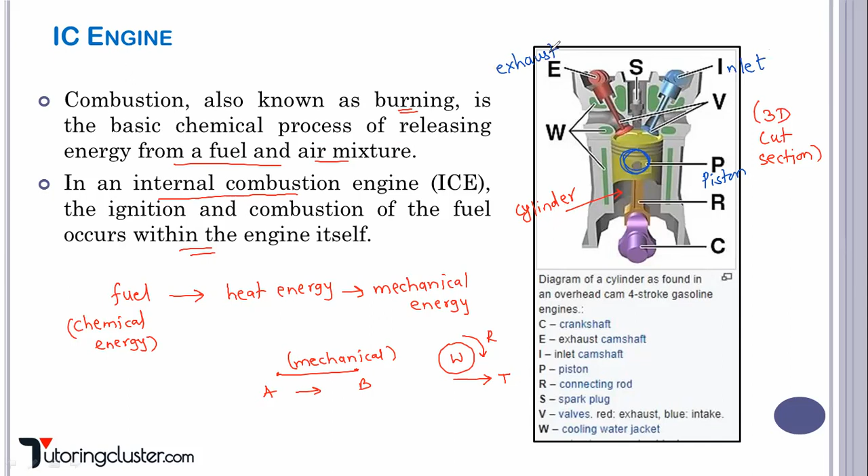Your piston is reciprocating inside the cylinder - this is your piston part. Then this is your inlet valve, from where the air-fuel mixture entry happens. This is your exhaust valve - we already know its function, whatever exhaust gases are produced, those are sent back to the atmosphere.

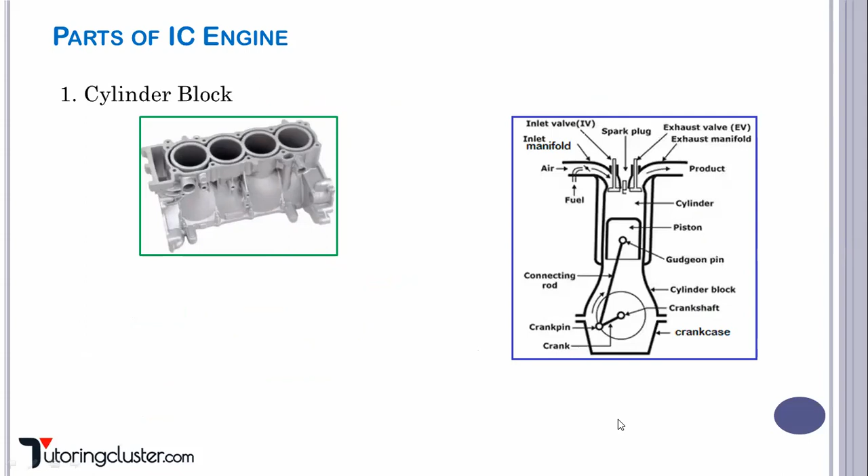Dekhiye kaafi easy hai, don't worry. Yahan pe combustion hone wala hai, so it is going to produce high pressurized and temperature gases. These gases are going to push this piston with downward force.

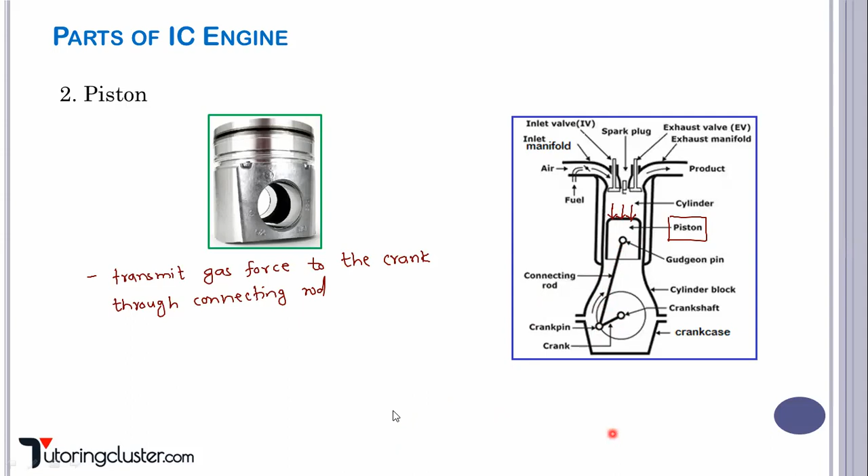So what is the basic function of piston? It is going to transmit this gas force to the crank through connecting rod. Is it clear? So this is basically the function of piston, and it reciprocates inside the cylinder. So hope this part is also clear - what is the function of piston?

Now third part, it is a piston ring. Piston ring kahan pe rahega? Obviously it will be above the piston, and piston rings are basically used to prevent gas leakage to the crankcase. Okay, so where is the crankcase? This is your basically a crankcase. So yahan pe leakage nahi hona chahiye. Gases yahan pe produce hone hain, but it should not come inside the crankcase. So that's why the piston rings are there.

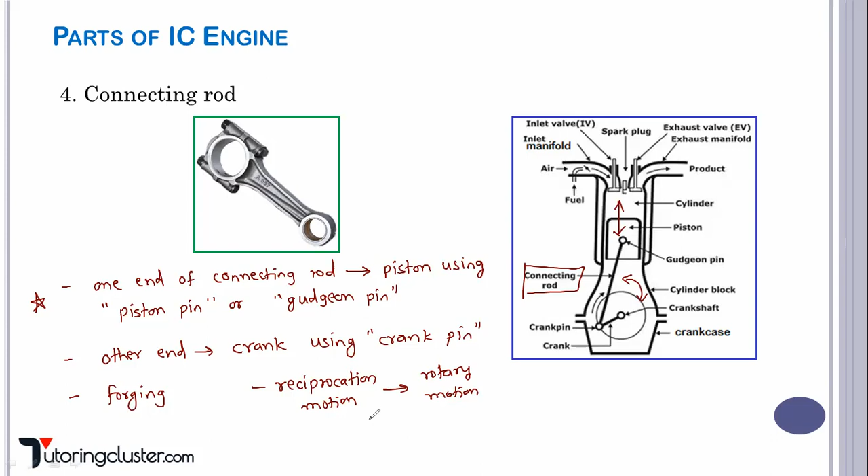So I hope connecting rod is clear. After the connecting rod - so pehle humne kya dekha tha? We have seen a cylinder, then we have seen piston, then we have seen connecting rod. Abhi hum crank and crankshaft ki baat karenge. So basically crank, it is integral part of crank is integral part of crankshaft only.

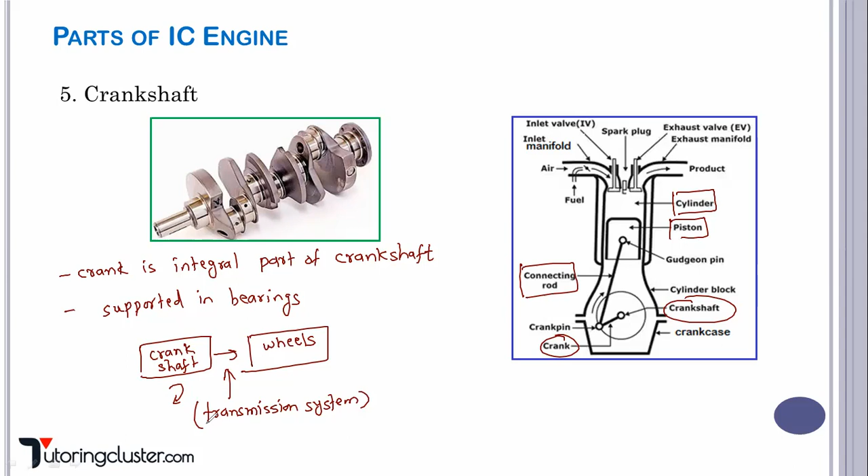So how are we doing it? This is how it takes place, right? You need to look at the output, what is the output, then visualize the things - that will be very easy for you to understand the concept. So these are some important points you have to remember regarding the crankshaft.

Now the most important - inlet and exhaust valve. So this is the inlet valve, and this is the exhaust valve. Inlet manifold and exhaust manifold - the manifold is connecting your inlet system with the inlet valve, and exhaust manifold is connecting your exhaust valve through the exhaust system. We saw catalytic converter and muffler, all those come in the exhaust system. Basically manifold is a connection, a bridge you can say.

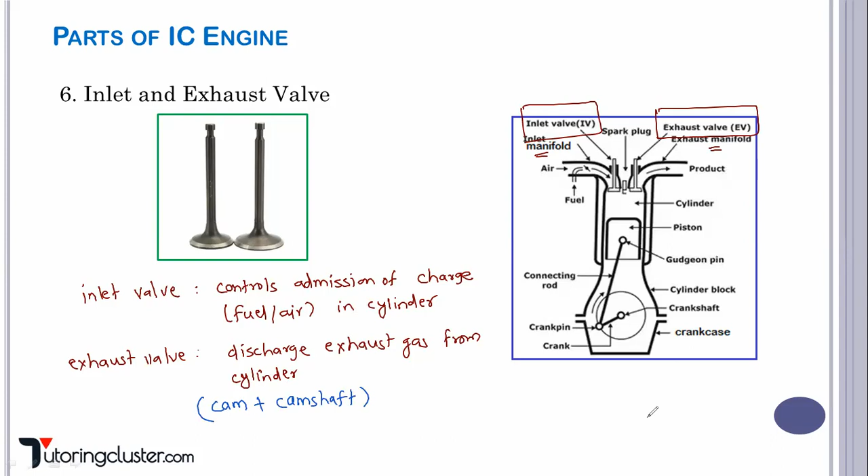Carburetor, right? अभी स्पार्क प्लग एंड कार्बोरेटर ये कहाँ पे आने वाले हैं? It will be in spark ignition engine and in petrol engine. You will find this in petrol engine only. Is it clear?

Function of spark plug is what? If you remember, क्या करता है? To produce the spark, right? So basically to produce high intensity spark to burn air plus fuel mixture. Okay, now what is the function of carburetor?

The function of carburetor, ये जो mixture आने वाला है, it is in which proportion basically? So basically the function of carburetor is to prepare mixture of air and fuel. किस proportion में वो mix होना चाहिए, right? So that is the function of carburetor. Okay, so basically carburetor prepares that mixture and sends it to the cylinder through what?

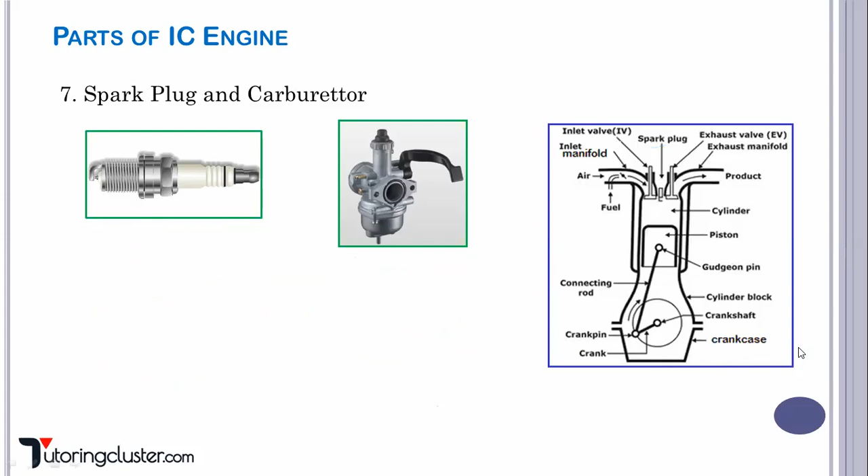So basically from fuel pump, fuel कहाँ पे आने वाला है? फ्यूल इंजेक्टर में आने वाला है, राइट? So fuel injector, it will inject the fuel with some pressure, high pressure, inside the cylinder. Is it clear? So what is the function of fuel pump?

The function of fuel pump is to increase the pressure of fuel.

And where does it send the fuel? It sends the fuel to the fuel injector, right? मैंने आपको बताया था at the end of compression stroke basically fuel injector works. Okay, तो अगर आपको स्पार्क प्लग, कार्बोरेटर, इसका फंक्शन ये कब करता है, या फिर फ्यूल पंप, फ्यूल इंजेक्टर, how the working takes place, I have explained that in unit number 2 videos.

Okay, about IC engine there are 3 parts. So in the beginning only I have told you I will be discussing only the parts and its function. जो इसका वर्किंग है ऑलरेडी आई हैव एक्सप्लेन, राइट.

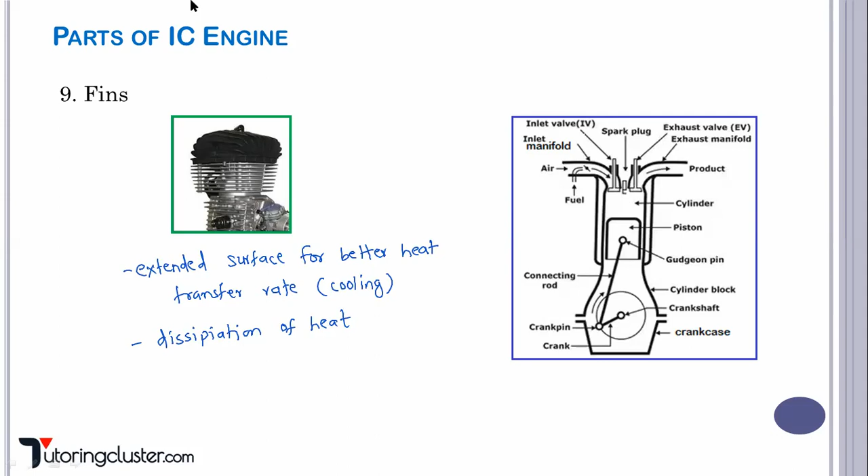So let us list down all the important points now, right? Okay, so I'm sharing a whiteboard with you so that we will revise all the concepts which we have seen just now. Okay, right. So basically we are talking of parts of IC engine. Okay, so what is the first part? Okay, so the first part we have seen, it is a cylinder.

Okay, क्या है function cylinder का? So combustion of fuel takes place inside the cylinder. It is made up of cast iron, aluminium, right? Piston reciprocates inside the cylinder. और material आपको कैसे select करना है?

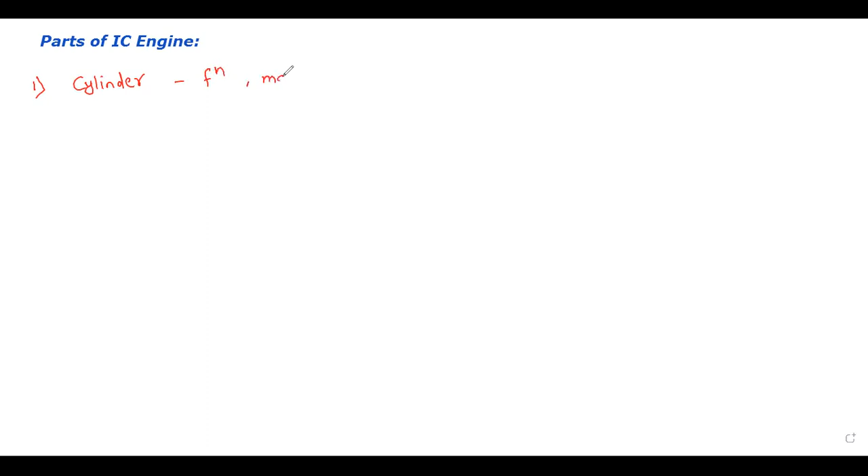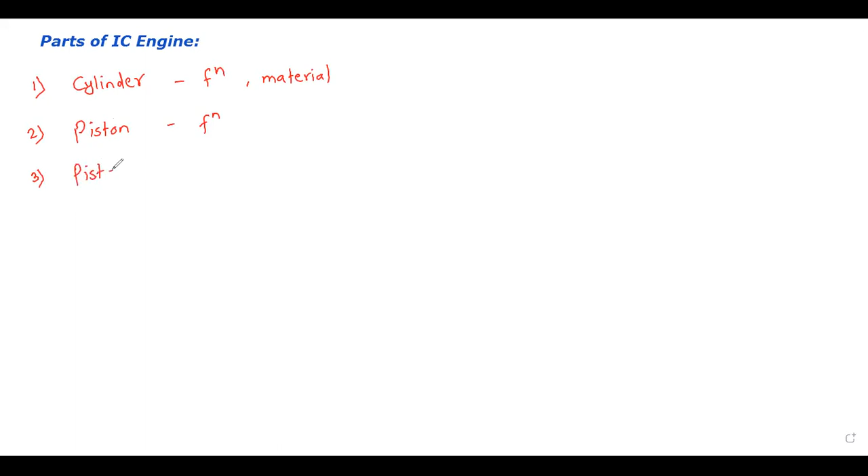Material you have to select such that it should withstand high pressure and temperature. Then second part we discussed is the piston, which basically reciprocates inside the cylinder. The function of the piston is to transmit the gas force through the connecting rod. Then we have piston rings, whose function is basically to avoid the leakage of gases into the crankcase.

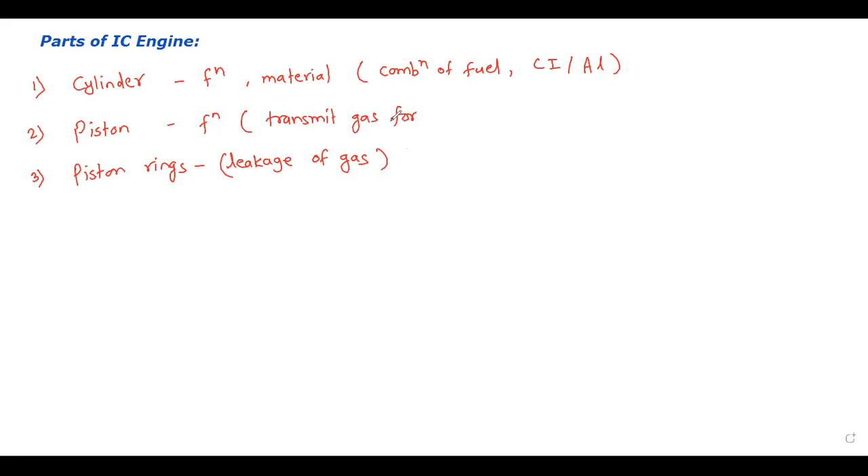Let me write down the function of the cylinder. Combustion of fuel takes place inside the cylinder, and you can use cast iron or aluminium for it. Then the function of the piston is to transmit the gas force to the connecting rod.

Then the fourth part we have seen is the connecting rod. What is the function of the connecting rod? Basically it converts reciprocating motion into rotary motion. One end of the connecting rod is connected to the piston - what do we use? We use a gudgeon pin. Then the other end is connected to the crank using a crank pin.

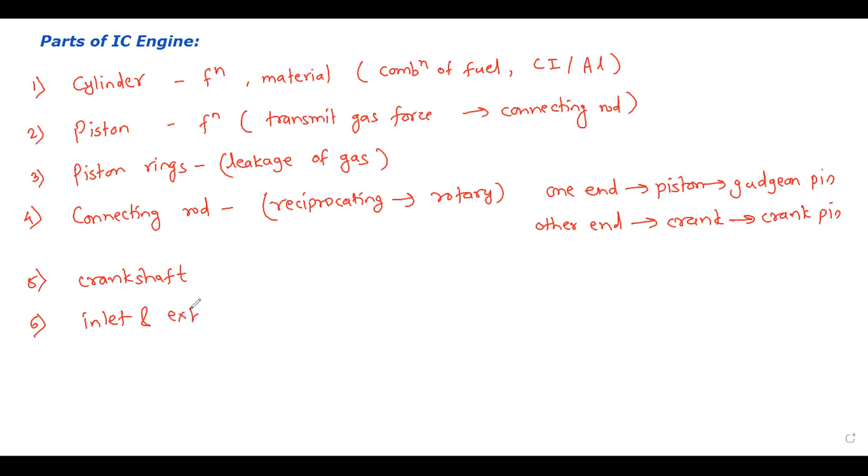Then the fifth part we have seen is the crankshaft. Basically, the crank is an integral part of the crankshaft, and these are supported in bearings. Then after the crankshaft, you have the inlet and exhaust valves, whose function we already know.

Then you have a spark plug and a carburetor - you will find this in an SI engine or petrol engine. Then you have a fuel pump and fuel injector - this you will find in a CI or diesel engine. And the last part we have seen is, for cooling purposes, we have fins for dissipation of heat.

So these are some important points you have to remember from an exam point of view. I hope now all the basic parts of IC engines are clear to you. You can pause this video and note down all these important things. So these 8 to 9 parts you have to remember, along with the function of each part.

Then the gudgeon pin - this is more important. Function of connecting rod is more important. Then material for cylinder. Then spark plug, carburetor, fuel pump, injectors - these are some important points one should remember from an MCQ point of view.

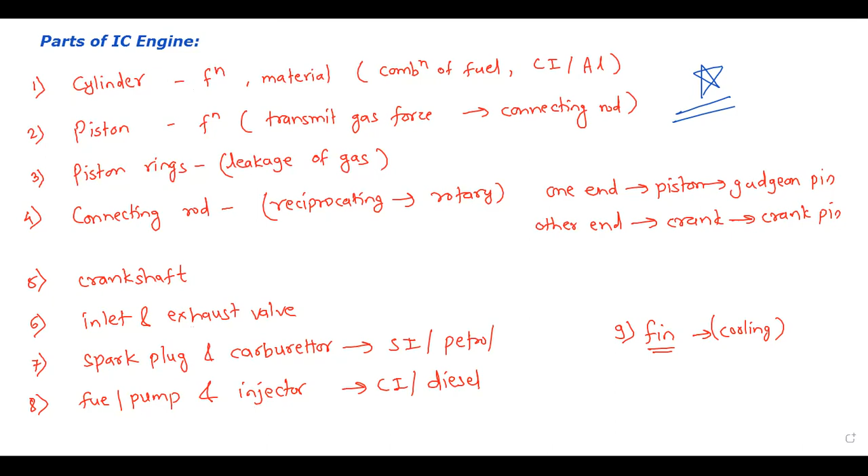So let us come back to the PPT. These are some important points related to IC engine, parts of IC engine. I hope you have got all of this.